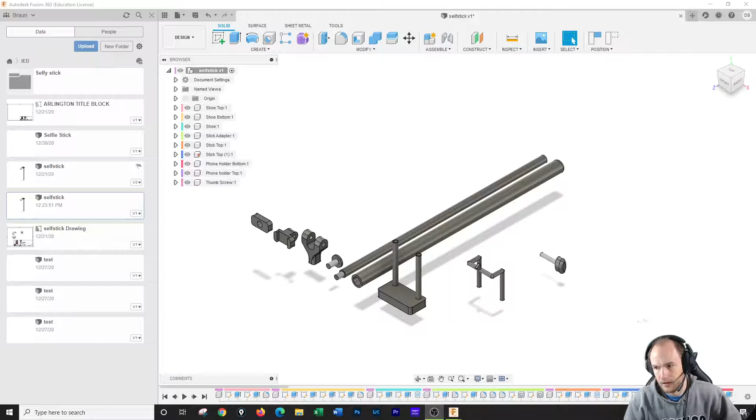All right, let's put this selfie stick together. So I've already grounded this piece.

To do that, you'd select it over here, and right click, go to ground, which it's already grounded, so I will unground it and ground it.

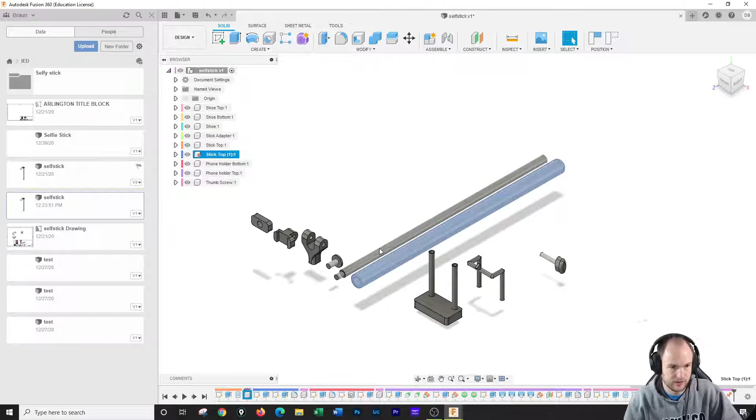So I've grounded this piece. This piece right here is going to go inside of it. So I'm going to hit joint, do capture position because it leaves it where it is, and select slider, good.

And then I want to join this into here, just like that. And then I actually want to put some limits on this. So I'm going to go in here and do limits minimum. We'll say...

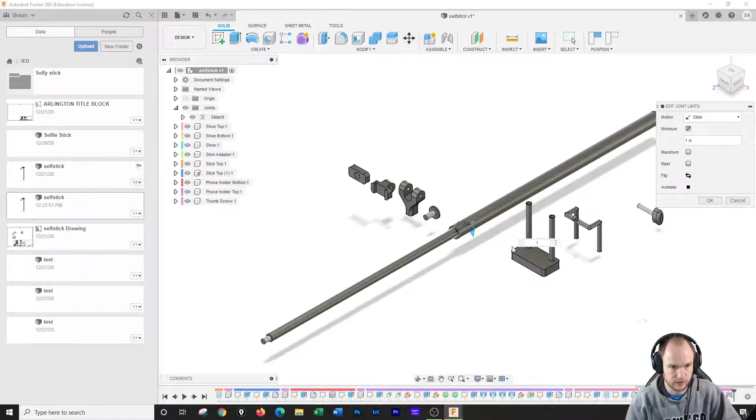That's probably fine. I can actually move this. Let's see, what does 1 do? 1 brings us in. So if I move it in 10, say 10, I can move it in more. Let's say 12. Okay, 12 means it's going to be down at 12.

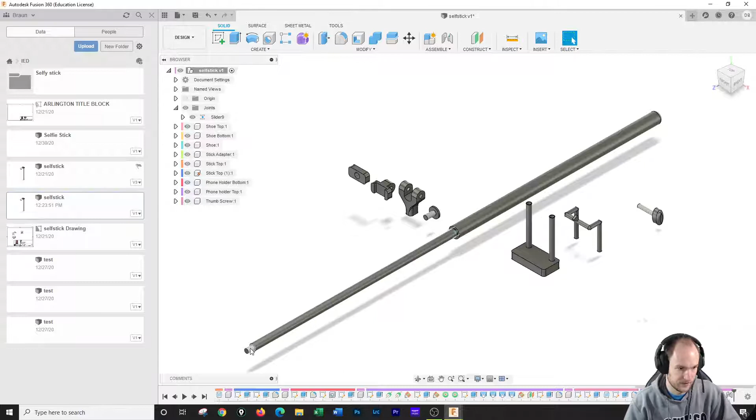And let's say for a maximum, maybe we do 0. So 0's got to be the maximum, so the minimum can be 12. For whatever reason, it gives me a lot of heartache about picking which one is which. There we go. So 0 and 12, in and out.

Nice and easy. The next couple of things we're going to do are all going to be rigids, the majority actually. So we're going to do a rigid between here, the end of that, and right here.

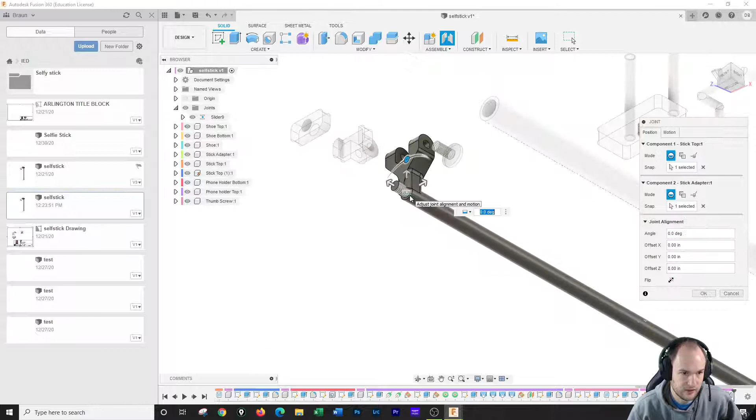Oops, I blew that. So joint. We want between here and here, and we want that to be a rigid. So there we go. So we got a rigid there and there.

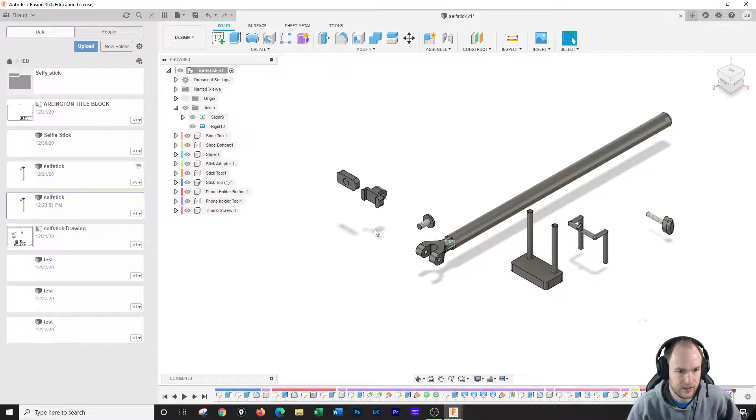So this can slide in and out. The next we're going to do is a revolute. So we're going to do a joint between here and right here, and this is going to be a revolute, so it can rotate.

We're going to put some constraints on this. I think we're going to do 90 and negative 90. And it's going to be difficult, so do 1 and then change the other one to 90. 90 and negative 90. Maybe this one can be 90 and the other one can be negative 90.

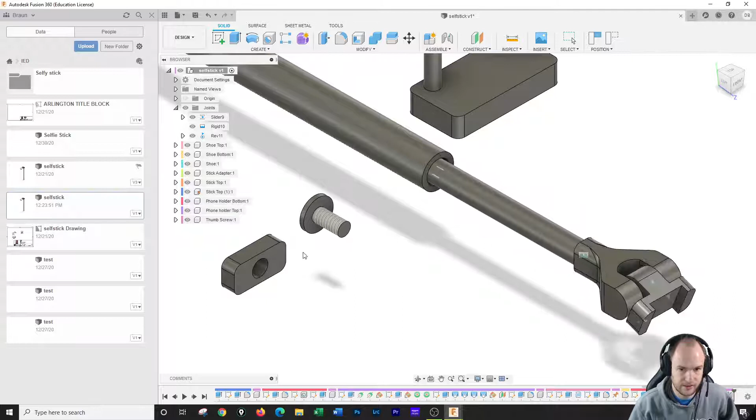There we go. So now we got 90 and negative 90. So it goes up and down, as you can see, and it won't go further down than that, and it won't go further up than that. Okay, great. I'm going to leave it right there for the rest of the assembly. I'm going to go to joint.

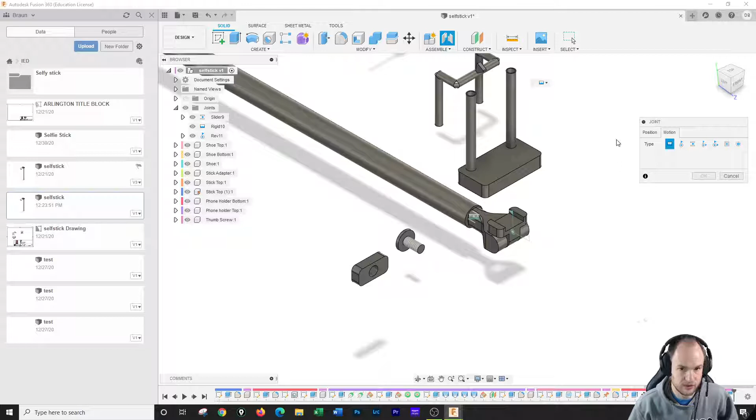And the next thing I want to do for joint is go to rigid. And I actually want to do a joint of this on the bottom here, like that. Then I'm going to join this centerpiece right here on the arc, that centerpiece, to its corresponding center mark over here. Hopefully this will go well. Click OK. It brought the piece with it.

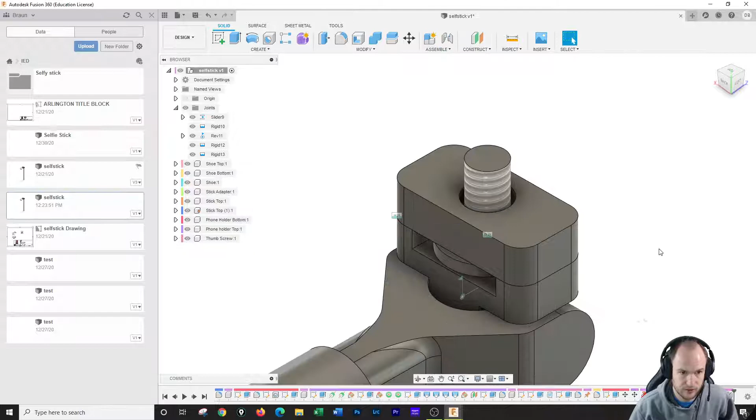It went excellently. We're going to do joint again. Right here at this top circle, we're going to join that to this. And we're going to click OK.

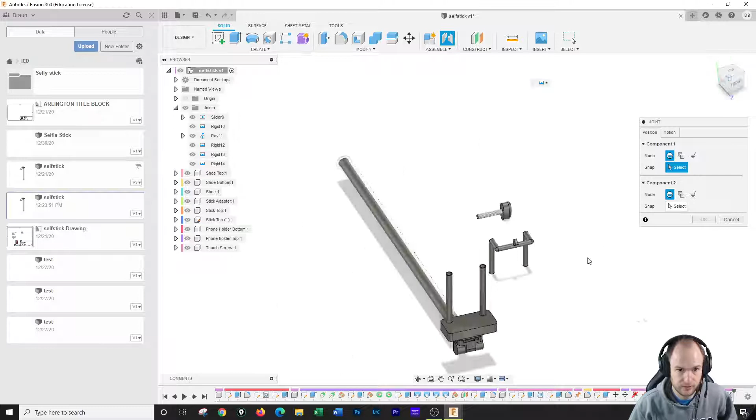So that's all set. We can join the thumb screw on. Could have done that earlier, but it's okay to do it now. So I'm going to click right here to right here.

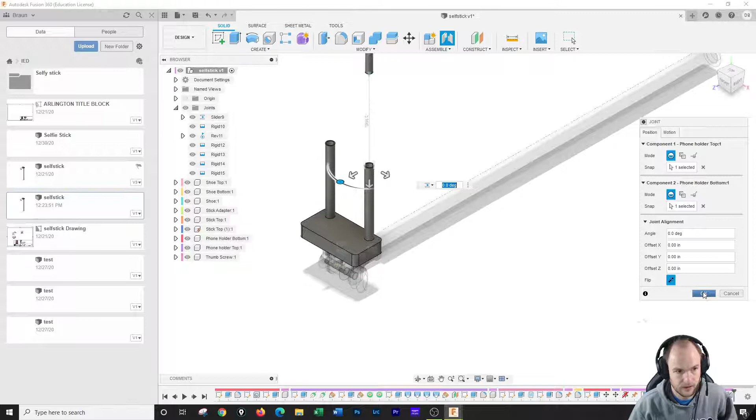So that's all together. And then the last thing we got to do is a slider joint. So joint, motion, slider, go back to position, select here and here. It's doing its thing. I'm going to click OK.

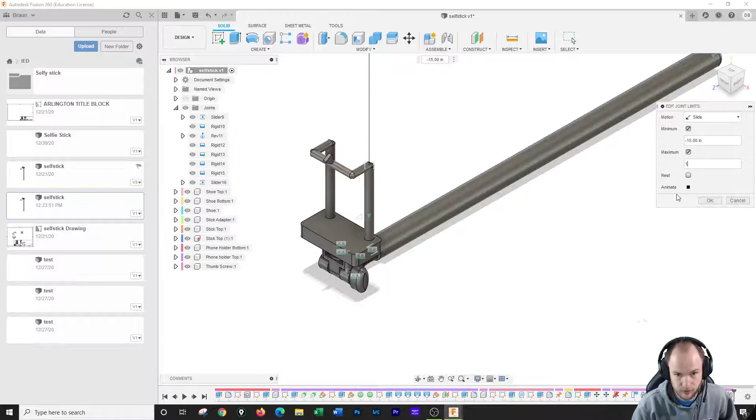And then I'm just going to add some limits on that slider. So let's say minimum is 0, maximum is negative 1... not negative 15. Negative 1, nope, maybe 1.5. 1.25, and 0. So let's see what this looks like.

This looks good. So it clamps your phone in, up and down. Remember, yours doesn't need to have this little area on it. It's just the example one I did.

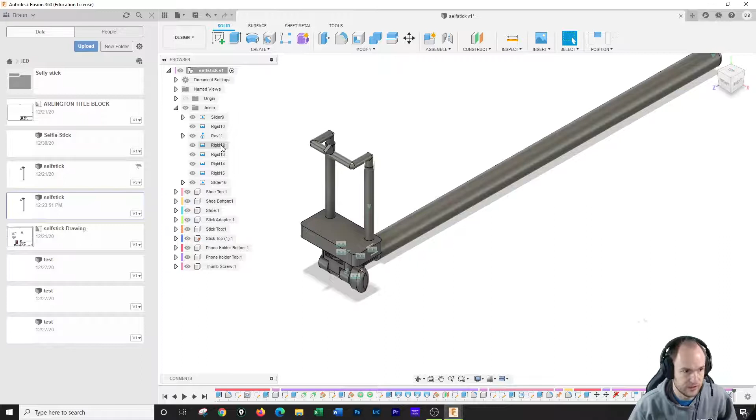In and out. And then you can go to each of these, like I can go to the Revolute and I can tell it exactly where I want it to be. Like if I go drive, I could say be at 0, which it should have done. Drives joint to 0, there we go.

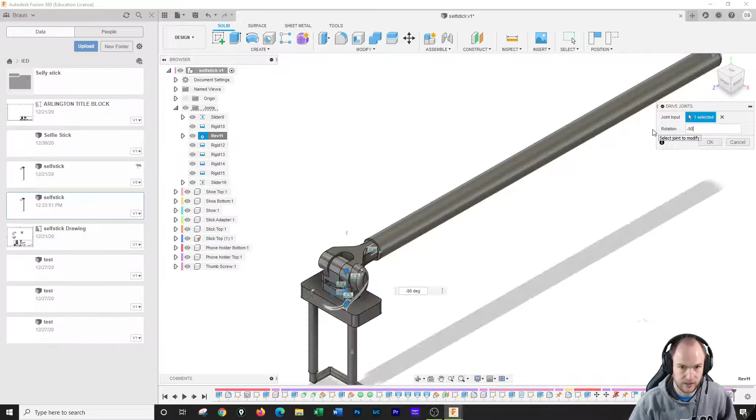I could say 5 degrees, whatever angle within the constraints you want. See, 180 is not within the constraints, won't work. Negative 90 is within constraints, it'll work. So you can actually position this exactly where you want it. I want it at 0.

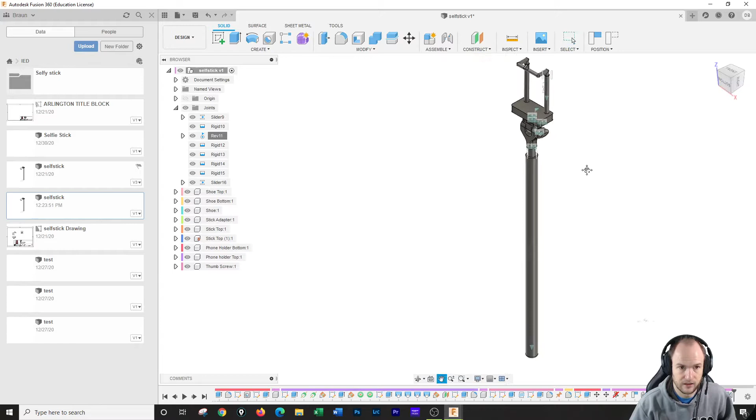And then we got both of our sliders that we can manipulate as we go. So this is the selfie stick, right there. All right, good luck.